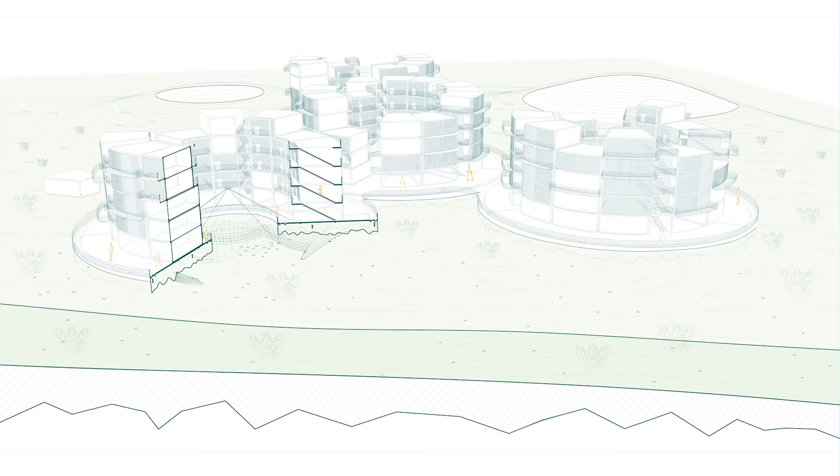We believe that man must return to living as part of biodiversity and stop seeing it as separate. Nature works in flexible systems, constantly changing and evolving. All forms of nature have architecture, an arrangement of material in space and over time that determines their shape, size, behavior and duration, and how they come into being. Humanity must learn from nature and act in the appropriate way.

Our landscape unit is a long narrow valley, naturally walled by the Golan Heights to the east and the Naphtali mountain range to the west, while we are located in the northern part of the valley just beside the city of Kiryat Shmona.

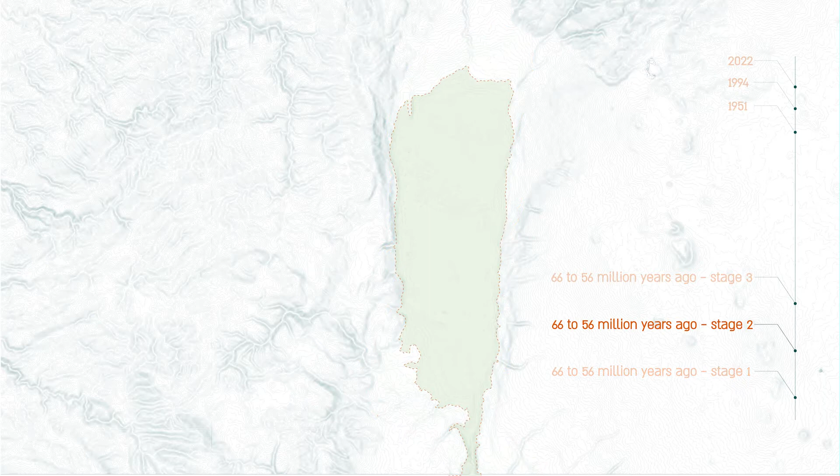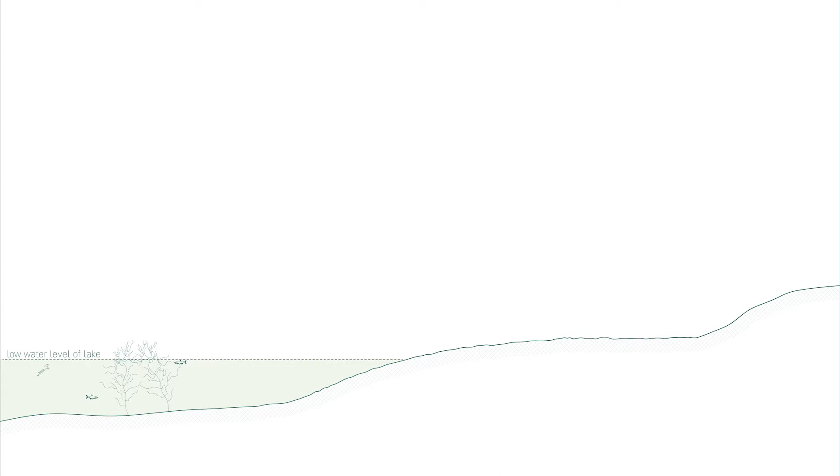In the early days of the Hula Valley, the entire area was an enormous lake that covered the entire valley. Gradually the lake got miniaturized with time, but then got an extra push with the Israeli settlers and their attempts to dry the marshlands of young Israel back in the 1950s, leaving a certain section of land that could bring back the ecological system that once occupied that area, back to life.

The landscape unit would have been the bridge in the gap between local organisms and marine organisms. That very same water-based ecological system generates opportunity to increase agriculture, and help revive the marine economy.

The location of the site allows the accumulation of rainwater from the dry valleys, and the routing of some of the sources of the Jordan, for the benefit of flooding the site again.

Therefore, we have chosen 3 water-based organisms that could coexist side by side in the same space cell, and that would also fit in naturally in this ecological environment that we've brought back to life, all in favor of the future Superblock.

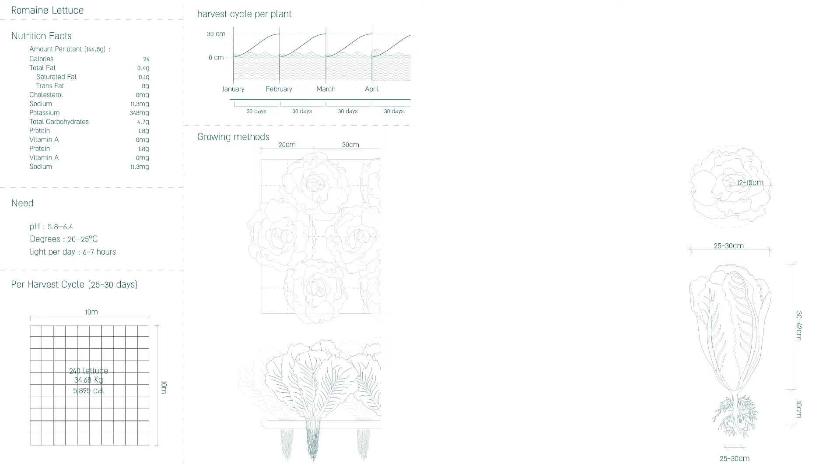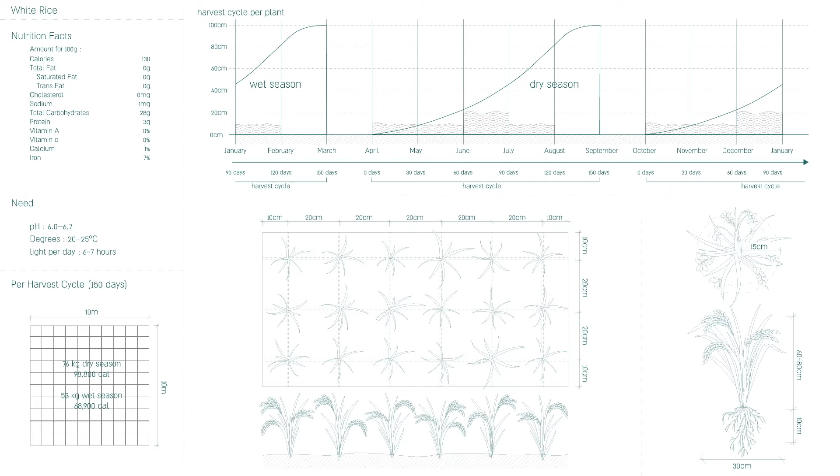Those different crops can provide nourishment all year long with different harvest times. The principles of planning grow from below, through the basic needs of those organisms and their ability to properly nourish a number of human beings.

In the graph, you can see the caloric ratio, in front of the vegetation cycles, and the harvest of the 3 organisms, which will be the source of energy for man. We calculated the calories for each 100 square meter growth cycle.

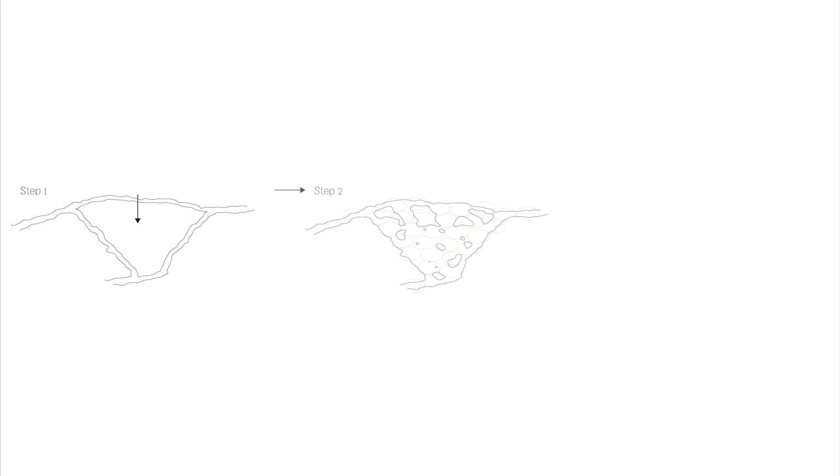The project began with the decision to return the swamp to the site. We lowered the ground by 3 meters and created a new topography. We divided the topography into clusters in the shape of a circle whose radius is 150 meters, consisting of several heights of topography.

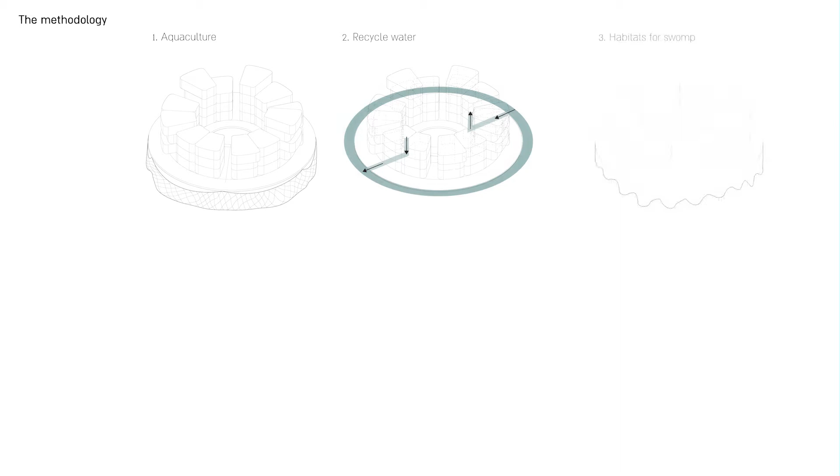From the research of the project, we refined 3 guiding principles that led us to make the design and practical decisions.

The first guiding principle is aquaculture, which is the main component of the project. Following the research we analyzed on fishing methods, we created a new system that works together with the block.

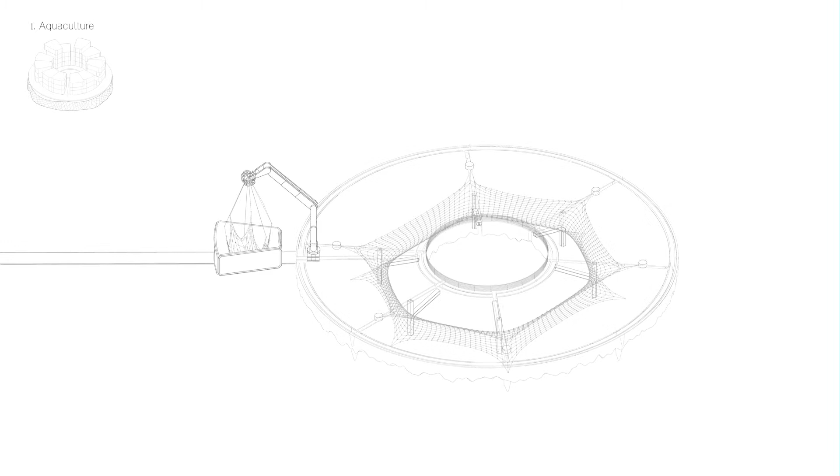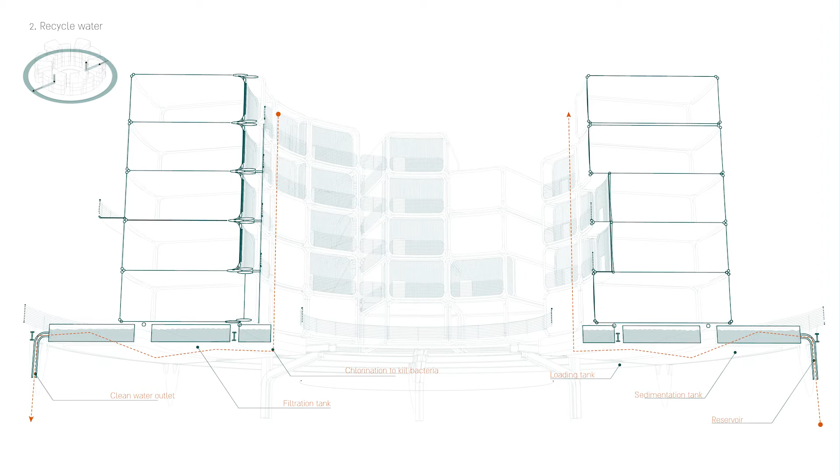The second principle is water recycling, with the help of absorption, filtration, and emission systems. These systems are designed to save water consumption, while returning water to nature, in a way that strives to maintain ecological balance. At the site there are pumps and containers at the base of the unit, which are embedded within the constructive array of the structure.

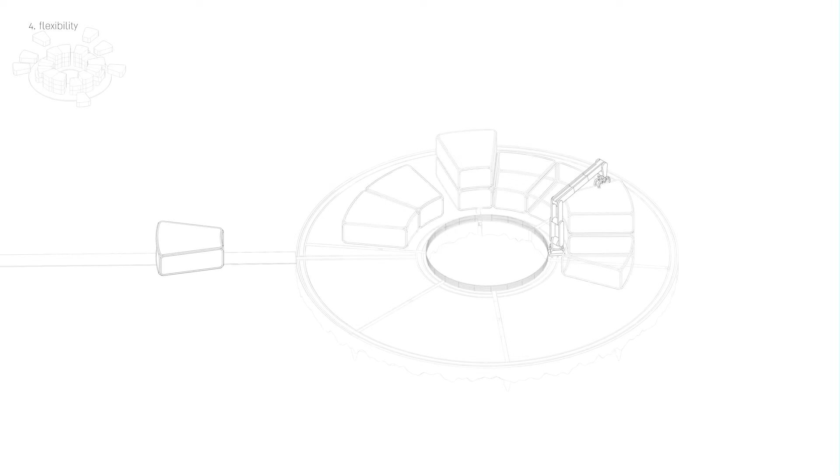In the fourth principle, we chose to build units which can be disassembled and assembled for the purpose of quick, easy mobility while creating flexibility for the ever-changing human needs and reuse of the material. In each block there is a crane, which makes up the units, and operates the aquaculture.

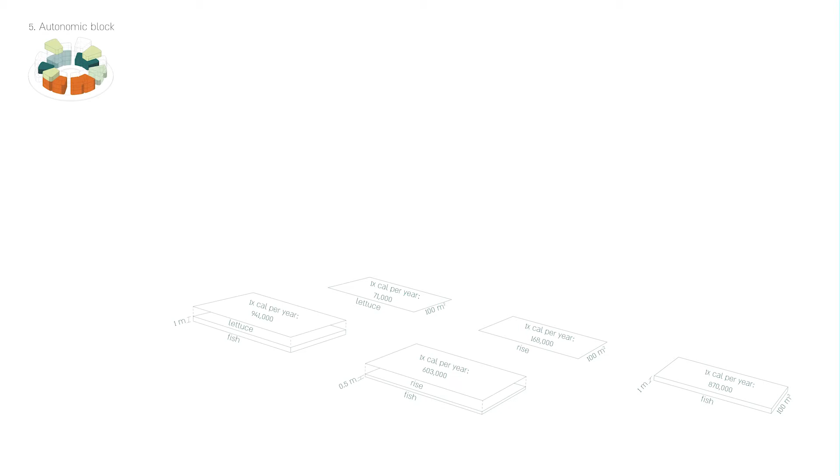The fifth principle is autonomy. Each block knows how to provide for itself the basic needs, which are food, accommodation, employment, leisure, culture and housing.

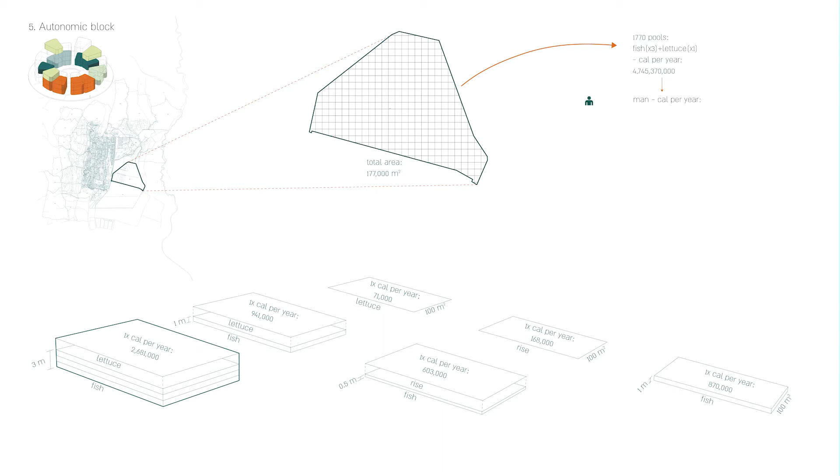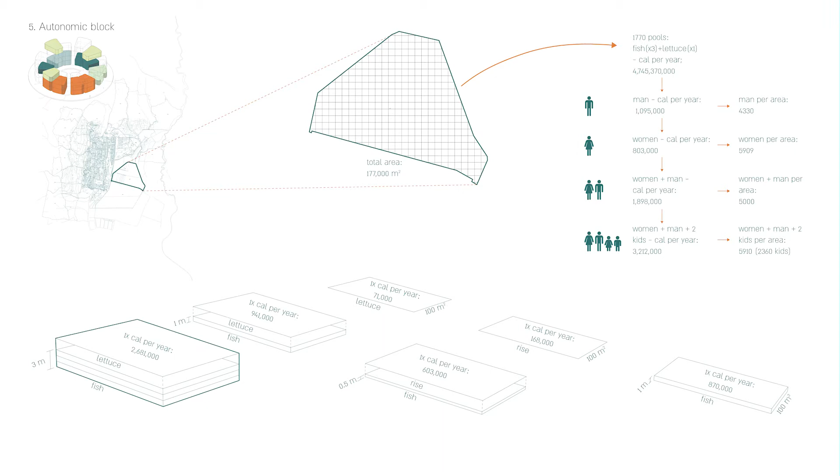The first experiment we conducted on the site is in the percentage of water flooding of the entire area. The purpose of this experiment is to examine the amount of people that the site can economize on the water base.

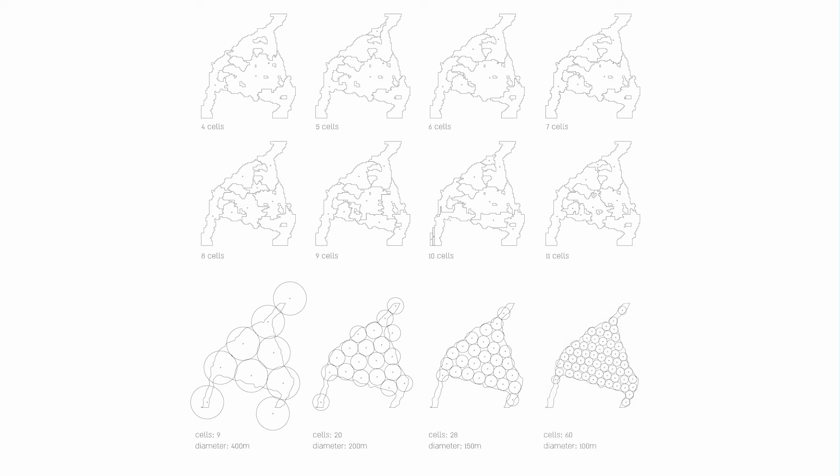We then performed experiments in dividing the site into clusters. Each cluster shows a different division of the site that takes into account the topographic component. The clusters are formed as centers of equal weight in relation to each other. We then tried to produce clusters in different radii that would dictate the maximum walking distance in a particular neighborhood.

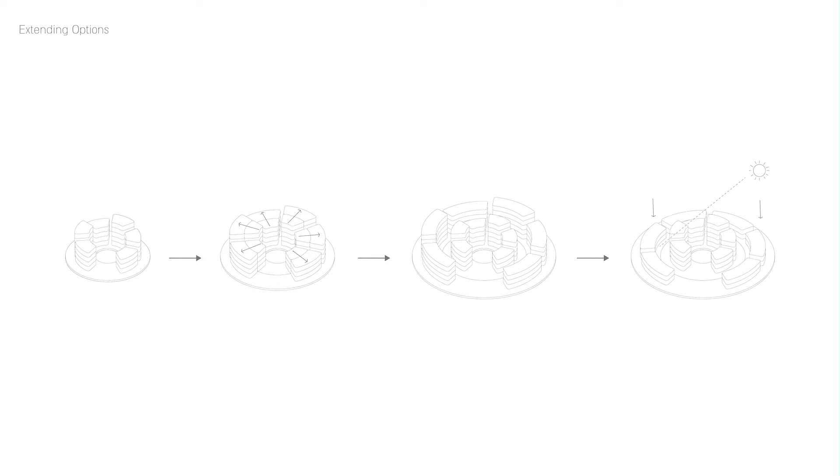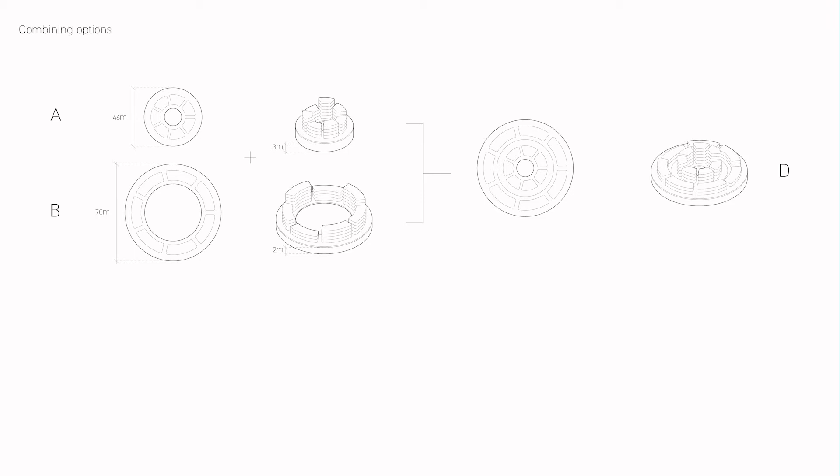We finally came up with 5 different combinations in the development of a single block. Combination D consists of A and B. Combination E consists of B and C.

The connection between the blocks is made in a linkage and not in accordance with the grid, in order to allow more exposure of the land and agriculture to the sun.

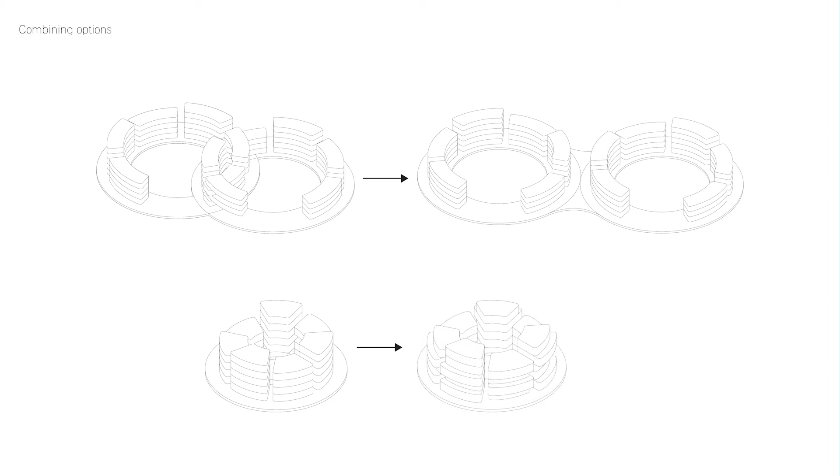The design outcomes start with a master plan. The master plan is planned for expansion. The first settlement begins on the banks of the swamp and grows inwards.

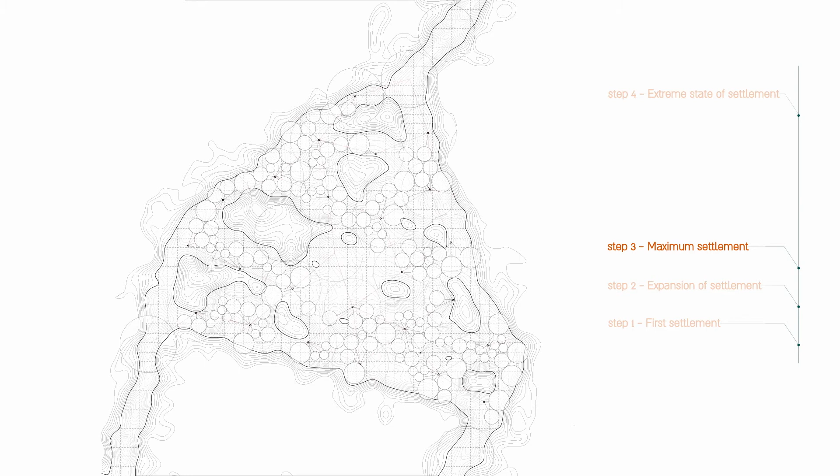It is only planned to reach stage 3, because it is optimal for the angle of the sun. Phase 4 is an extreme phase that simulates full occupancy.

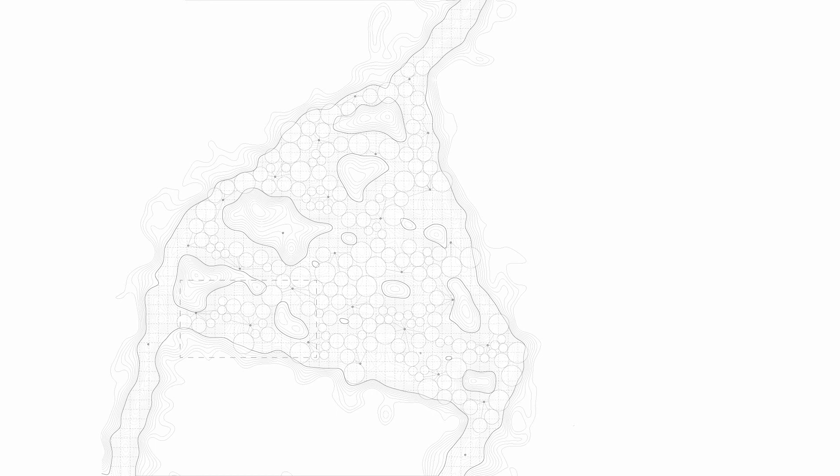The movement between the blocks is carried out around the perimeter of the buildings, and allows continuous and flowing movement. The shapes of the buildings are inspired by the world of aquatic plants and the typology of a fishing village.

The islands created at the site allow nature to grow wild, and man to create a connecting factor back to nature.

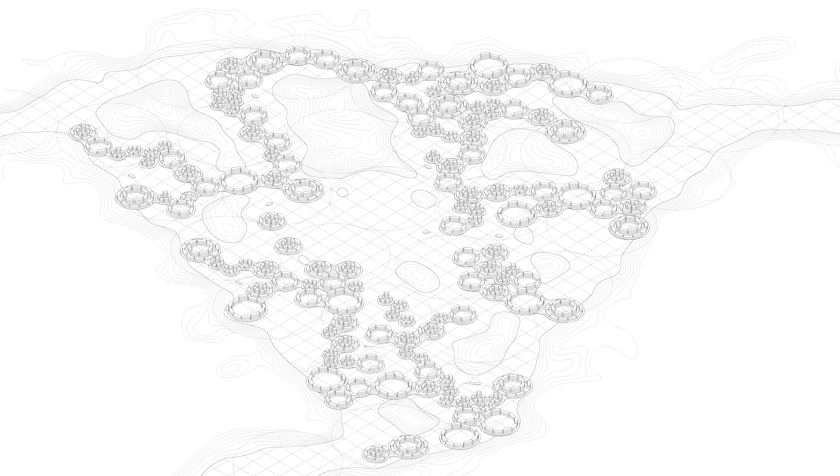Along with the basic programs that make up the block, there are general programs which serve the entire site, such as a hospital, market, and theater.

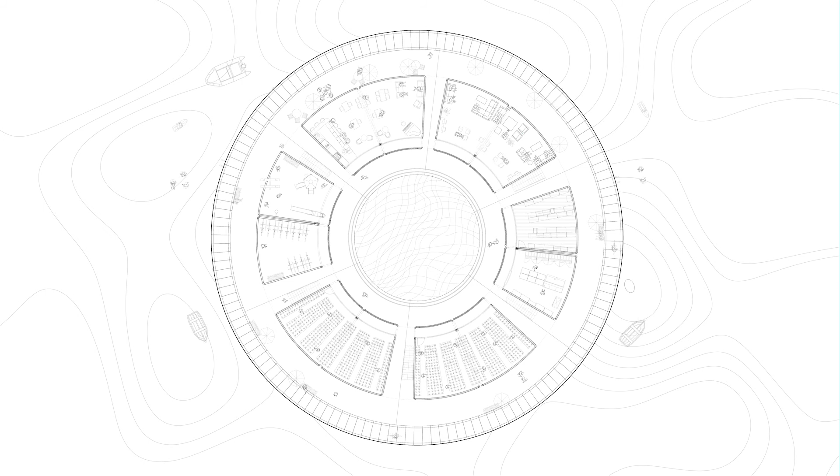The site has different programs. From the south we chose to place the agricultural units so that they get the maximum amount of sun. Adjacent to it is the barn, an open space, and a cafe.

The unit is a repeating detail, consisting of a frame, constructive of metal, with its walls of interchangeable materials in accordance with the desired program. In the inner front, there is a passage, which allows movement between the various units.